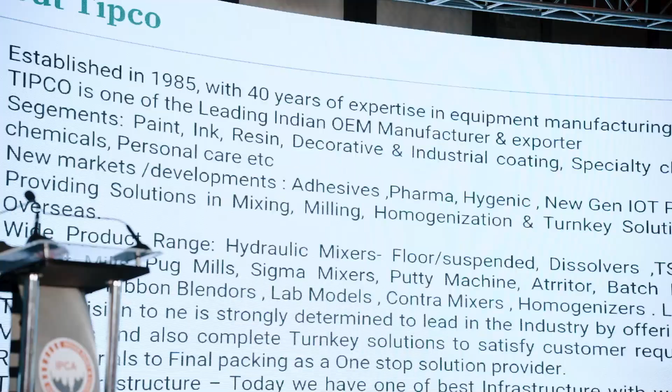The major new markets where we are focusing are adhesives, pharma, hygienic, and of course we developed some new generation IoT panels. Coming to the solutions, we are in mixing, milling, homogenizing, and of course turnkey solutions in India, and nowadays we are doing overseas also.

We have a wide product range starting from hydraulic mixers, floor, suspended, dissolvers, TSD - we have a wide range, bead mills, basket mills, pug, sigma, putty. So more or less we are making all the mixing and milling machines.

Today the vision of TIPCO is to be one of the strongly determined and leading companies in the industry, in mission and also in high quality products. And as a turnkey solution provider, we want to give customers a one-stop solution - just be with TIPCO, so we can give end-to-end solutions.

Today in the infrastructure, yes, we added CNC machines, auto polishing, so a lot of accuracy standards, trying to cover the needs and expectations of customers in quality standards.

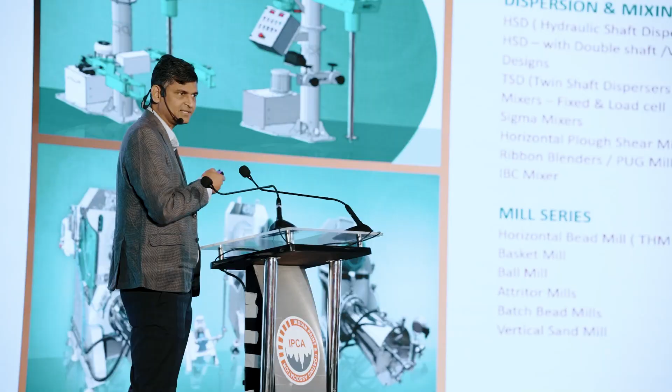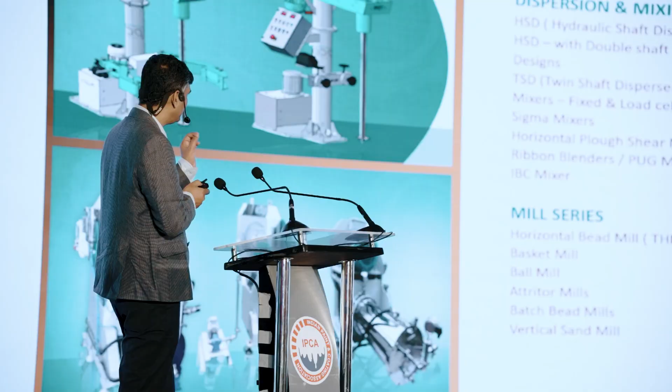High speed disperser or dissolver, we make in-house, and we sell 250 machines every year to customers. We are one of the good brands in this, and we have various features into it. We have double shaft, vacuum, various blade designs, which meet global standards. These various designs we make in-house, we are not relying on any other vendors. So even the teeth gap and everything will be well within given specs. We are meeting with that.

TSD, twin shaft disperser, fixed and load cell design, mixers fixed and load cell, Sigma mixers with an extruder we are making in our factory. Horizontal plow shear mixer with various sizes starting from 50 liter, going up to any size depending on requirements. Ribbon blender, pug mills, IBC mixers - those are things which we are making in our factory.

Horizontal bead mill, and we call it mill series. It consists of horizontal bead mill, THM, THC, TSD series, basket mill, ball mill, attritor mill, batch bead mill, and vertical sand mill.

Laboratory model, when we say, so we consist lab horizontal bead mill, lab basket mill, lab ball mill, lab attritor mill, lab batch bead mill, lab vertical sand mill, lab Sigma mixer up to 5 liter, lab homogenizer 1 to 5 liter, which is ideal for lab, and lab multi-shaft mixer 1 to 5 liter.

We are also coming up with the planetary. So if anybody is having some high viscous paste mixing requirement, either they go for Sigma, or they can go for multi-shaft, or they can go for this planetary range.

Homogenizer, which also consists in-line, in-tank homogenizer, LPM like liquid powder. These are generic in nature, so people are using in the market. SS reactors, pigging solutions. We have a German tie-up, I have already briefed that. Filling machine, that also we have developed for paint industry.

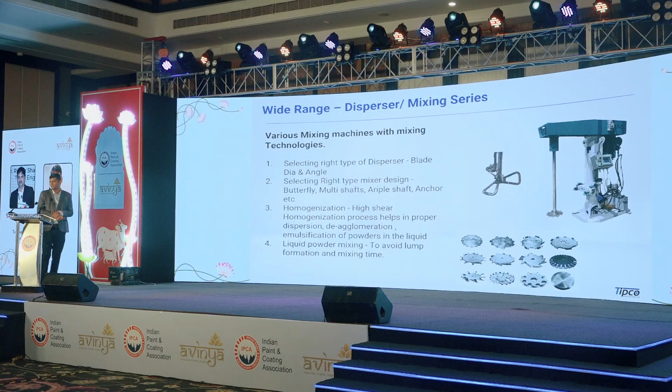So various mixing machines or mixing technology we have developed and we are also developing. So these are high speed dissolver, which is commonly known in the market. We have various agitator design, say blade design.

So we have sawtooth blade, we have butterfly blade. So depending on the requirements, we suggest those things. Or say shear requirement. If you have a shear sensitive product, so we recommend different blade design.

If you have any vacuum requirements, so we can also address those vacuum requirements as well. We could provide a lid with O-ring system so that it will close properly and you could apply vacuum to it to get deaeration properly.

We have TVHSD as well, which is a customized design. You can have 180-degree movement within this high-speed dissolver, and you can address all three vessels with one single machine. So it is an economical way to do or increase the productivity of your plant.

We have homogenizer. We have series of homogenizers which addresses your solid liquid injection manifold, where you could induct your solid and directly make, say, hydration. You can increase basically the hydration of your product. So solid directly can be incorporated into inline series, and then you can do the recirculation. So no fish eyes, no lump, and you can get a homogeneous mix of that.

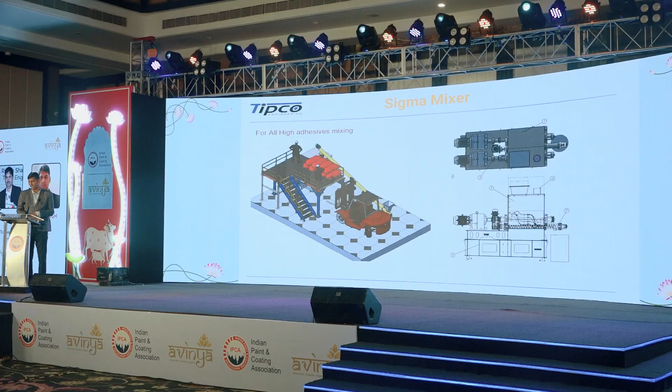Then we have the Sigma mixer, which addresses applications like making grout. Many paint companies are now coming into construction chemicals, so I'll cover this part. For making grouts, a viscous paste, you require a Sigma mixer, because that viscosity is not addressed by any simple agitator or multi-shaft mixer. Either you need a planetary or a Sigma. Sigma is one of the Z-arm mixers, which has 3-4 blade designs. We have suggestions for that; once we get the application, we suggest what sort of arm is required for that kind of application. This is Sigma, which addresses that kind of stuff.

You can also have a discharge mechanism. There is a tilting mechanism as well, but we suggest a screw is the most ideal and economical way to discharge your material.

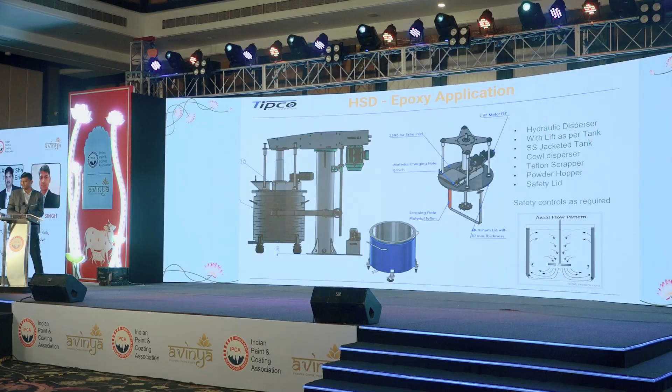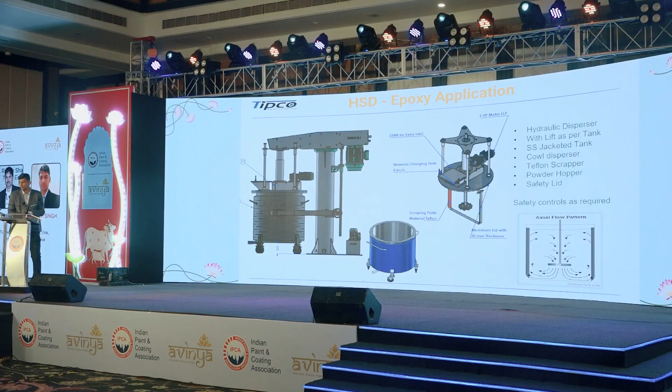HSD for epoxy mixing. Epoxy is also one of the happening areas, used in floor coatings and many other applications. There are PU applications too, which we haven't mentioned here. These are areas where you require a vacuumized system. So we make machines which address axial flow or radial flow, and we add shear based on the requirements of that particular mix.

These are our new product line, planetary mixers. You may ask what is the difference between Sigma and planetary - there's no very big difference. This is just a vertical form of the horizontal Sigma design. As we know, Earth revolves around the sun - planetary mixers do the same thing. That's how it creates a ball-like mixing action, where everything revolves around and gets mixed.

This can address - so far I've done some projects where we've successfully executed - a good number, 2 crore centipoise. Ideally we cannot measure 2 crore centipoise from any system, but we have executed it with certain good practices. This is one area we are coming up in.

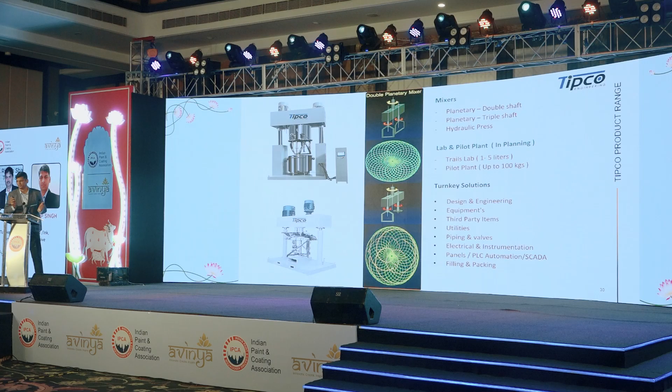Again, Planetary has 3 different models: one is Planetary Dissolver, one is Double Planetary, and one is Double Dissolver Double Planetary. That action is required when you're working with lithium and paste mixing, where the paste has its own viscosity range. Those are the areas where we can do this kind of work.

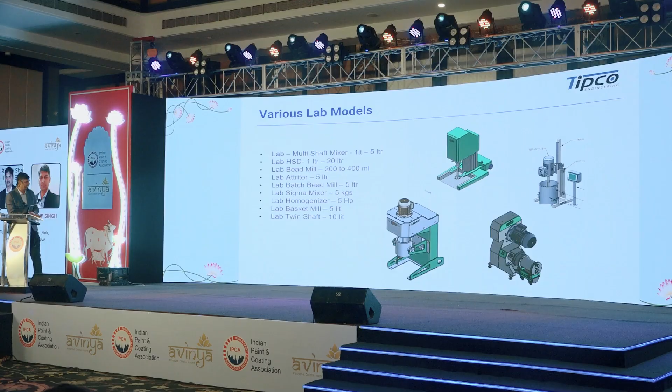Various lab models we have to offer for any new lab setup: multi-shaft mixer, HSD, bead mill, attritor, batch bead mill, Sigma mixer, homogenizer, basket mill, twin shaft. So we have a range to cover the entire viscosity range of mixing.

Today we have already done work coming to water-based paint and ink - close to 30-35 projects in India and abroad. There are a few client bases we've worked with, like Adhesives, Innovate, where we have enough experience to suggest a solution to a customer, starting from design, engineering, consultancy with PEB, civil, electrical, mechanical. So today we can offer a single-stop solution to customers.

Coming to a water-based plant, starting with storage of your raw materials - whether liquids, powders, anything - and utilities of it. This is one of the things TIPCO can also do. There are a lot of solutions when it comes to utilities - what type of compressor, what type of RO system, what type of ETP. Today we are associated with a lot of utility suppliers where we can offer cost-effective solutions. Buyers may also go and source it themselves, but coming to us as an OEM, you get a cost advantage, a technical advantage, and completing the project on time.

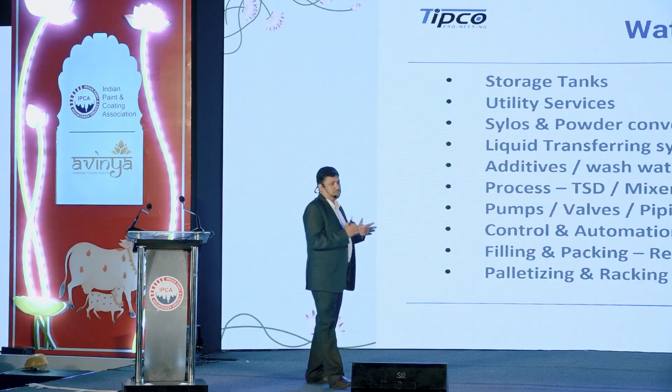This is also very crucial when you are designing your pumps and pipelines. You need to have a proper and efficient piping system, because this is a running factory. You can have problems anytime.

So you need service and maintenance provisions to address issues at a later stage. After control and automation, then you have filling and packing. What type of filling systems, what type of packaging - here also we can help you out. And after that, palletizing and racking.

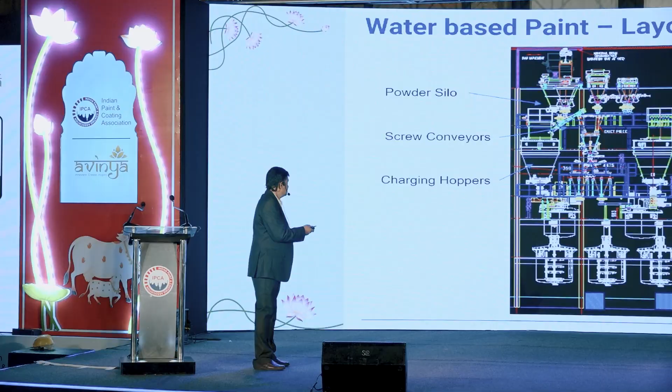So this is a typical layout for water-based, starting from the top, where we have powder silos. After that, how it is conveyed into your machines - screw conveyors or whatever the type of design. Again, charging hoppers, TSDs and things.

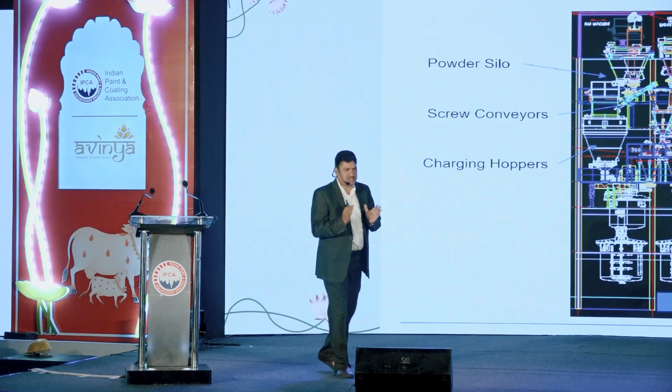We ensure always that your process space is occupied very, very less. You have total empty space at the ground, so that you can utilize your space very effectively. We have vertical space much, ensuring that we occupy only 20 to 30% of your total process area.

Today, after our last 10 years, we developed our own project engineering management team. As a project management team, we also offer layout engineering, process and mechanical engineering, piping design, civil, electrical, instrument automation, even firefighting. Whatever third parties are there, we will try to associate with them and give effective solutions. This is also about storage tanks and the various ways we can transfer.

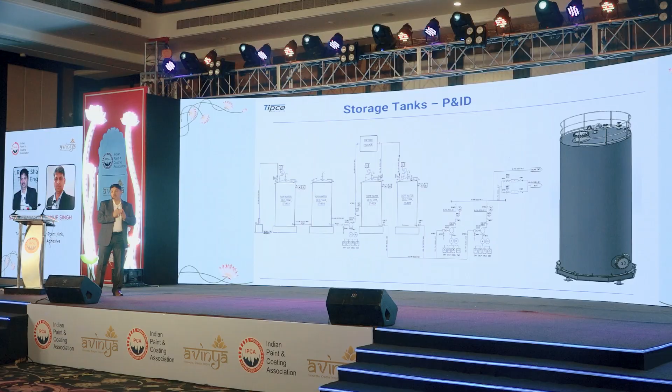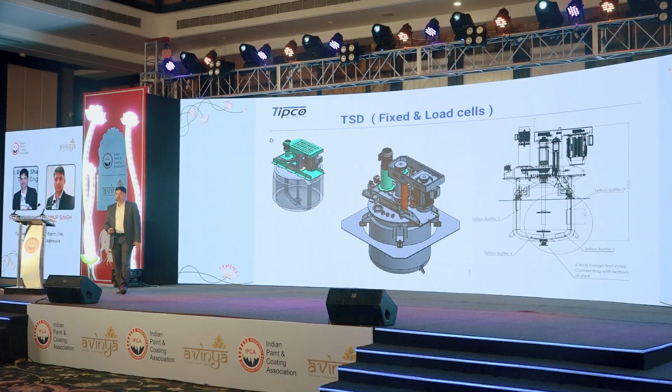Then coming to the process, how TSD mixers are done, different layouts. This is our own TSDs from our factory, where we can do either load cell based or fixed designs.

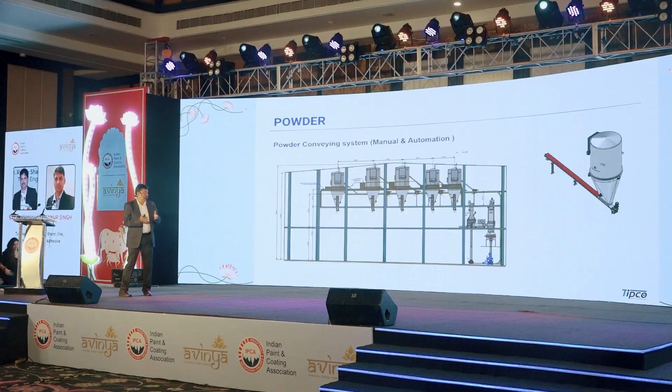Coming to the powder, there are different ways it can be done. We can do different designs, like whether it will be on a structure, how the silos are done, and whether it will be a jumbo bag station or a bag filling machine.

Again, in powder also, different designs based on the application. Sometimes the customer doesn't have a single powder - yes, we can have a single basic design. But in some applications the customer doesn't want different pipelines mixed together. Then we have different pipeline systems.

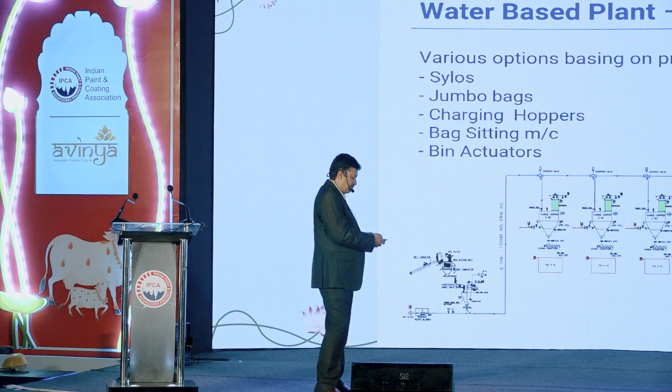Liquid transfer system - how the additives and emulsions are transferred. We have an efficient design that uses less space.

And coming to filling machines, we tied up with a few suppliers where we can offer filling machines for 1 liter or 4 liter. Even coming to bulk filling, we can have 10 liters and 20 liters.

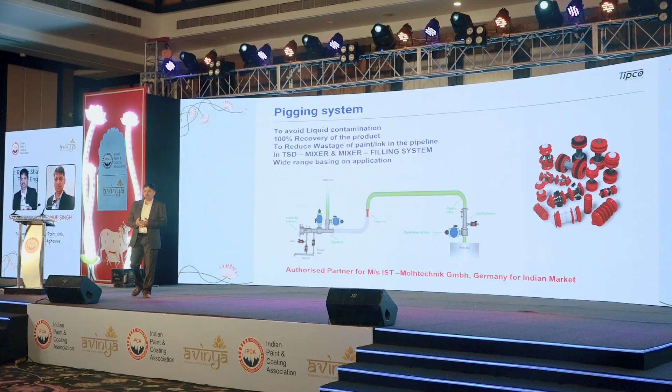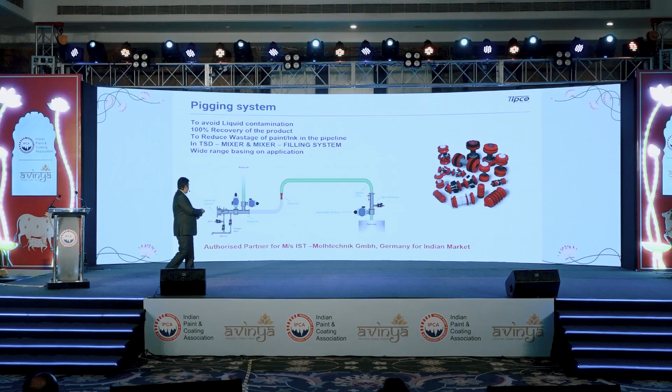And this is the pigging system. The pigging system - maybe some customers are already using it, but what exactly does it do? In some applications, one finished goods product has gone through and the next product cannot be mixed. So we can have a pigging system where once product 1 has gone, the pig will clear the line, then you can ensure the second product can be processed. This ensures your finished goods are not wasted, and you can go with a lesser number of pipeline systems.

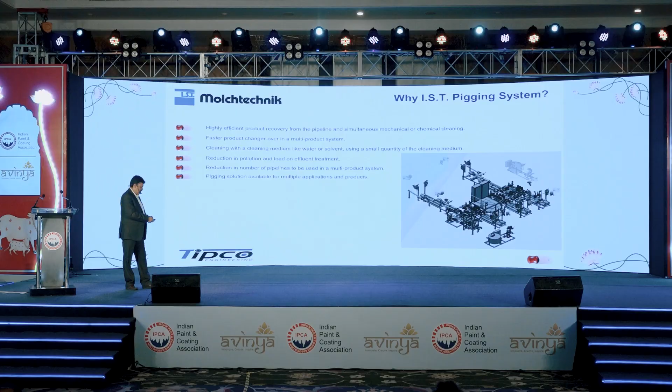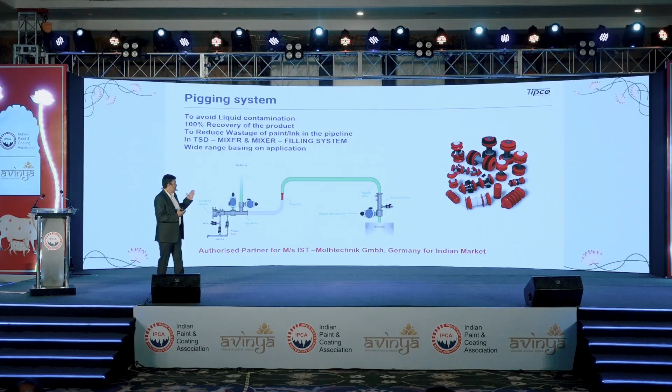So for this we are tied up with a European company, Molchtechnik GmbH, where we can offer the solutions. What we bring is a very cost-effective solution to the industry, where the technical part is supplied by them. Coming to the automation, execution is done by TIPCO. So overall we bring a very cost-effective solution here.

These are various machinery for the pigging system, like launchers and pigging systems. These are all supplied through our German partner.

And after all that, the other solution - today we talk about sustainability and green initiatives. So we tied up with a few suppliers where they can offer you zero discharge solutions like ETP and ZLD, where we ensure that whatever comes out is totally zero discharge. Practically it's not zero discharge, but we ensure it is treated well. The rest of the liquid can be converted into solid waste.